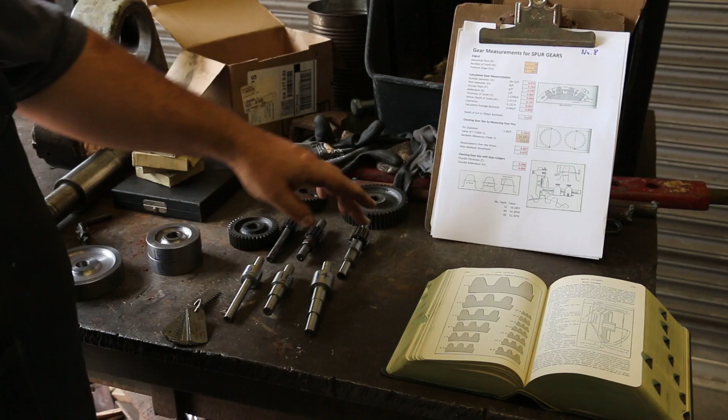So again, we have our pinion gears all laid out here, and you can see the original ones that we're going to be copying. These are just very worn, both the gears as well as the bearing surfaces. The bearing surfaces are probably the biggest problem on these, but the gears are also worn.

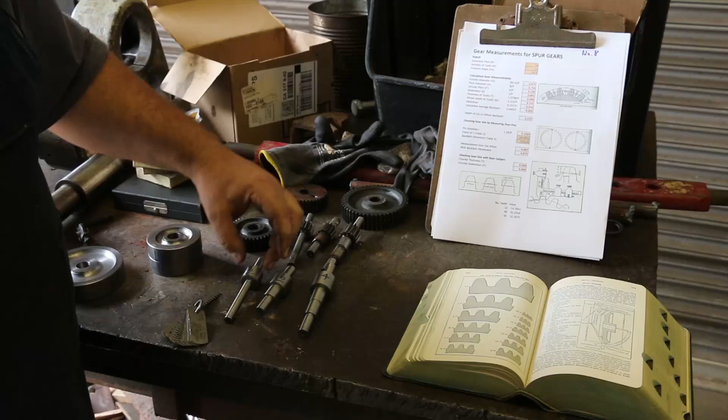So we've made the new blanks, and they're ready to go. But before I made the blanks, I had to figure out, because some people were asking me, well, how do you know what size to make the areas that you're going to cut into the gears? And that's a really good question.

There's a couple of ways I guess you can go about doing that. Obviously, if you've got the originals, you can just measure what's on here. But in this case, we've got some significant wear on these gears, so it may not be exactly the right outside diameter. So to verify that information, I basically did a little bit of math and calculated what that should be, and it's fairly easy to do that.

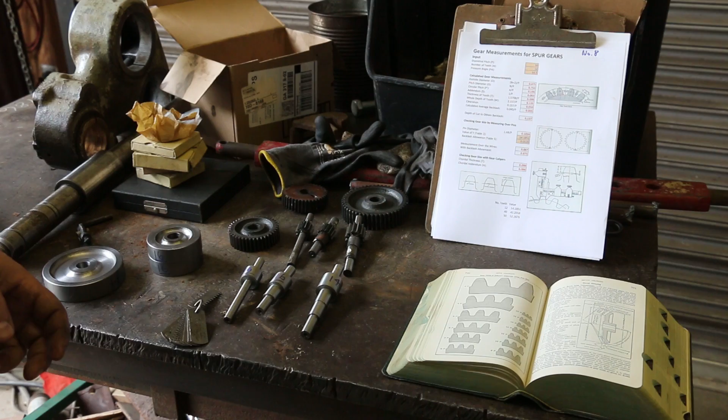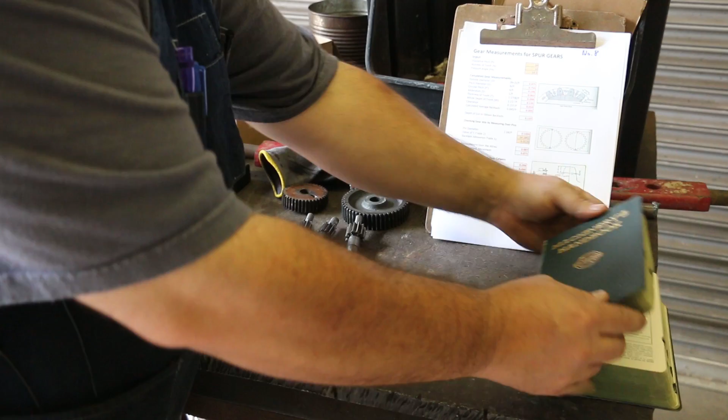So if you're going to cut any gears, you need to have a good reference, and most machinists are going to have a copy of Machinery's Handbook. If you don't have a copy of that, this is a really good reference to have. There's a whole section in here, probably over 100 pages long, that just talks about gears and gear making. Pretty much any information that you need to know, you can find in here.

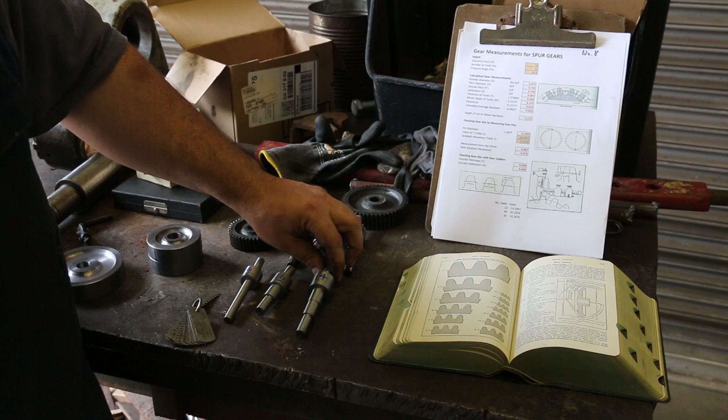So what do you need to know? Well, depending on your application, you could start out with knowing several different things. But in a case where you're copying gears, the two pieces of information that you really need to know are, number one, the diametral pitch of your gears, and the number of teeth that you're cutting.

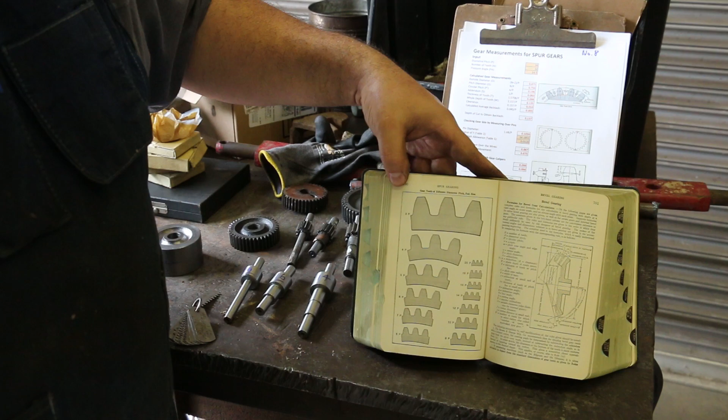Now, the diametral pitch is basically the size of the actual gear teeth. The pitch is going to be a number, and it's going to come down, I believe, to the number of teeth per inch is the way that this works. That may not be exactly right, but I'm pretty sure that's what the pitch is.

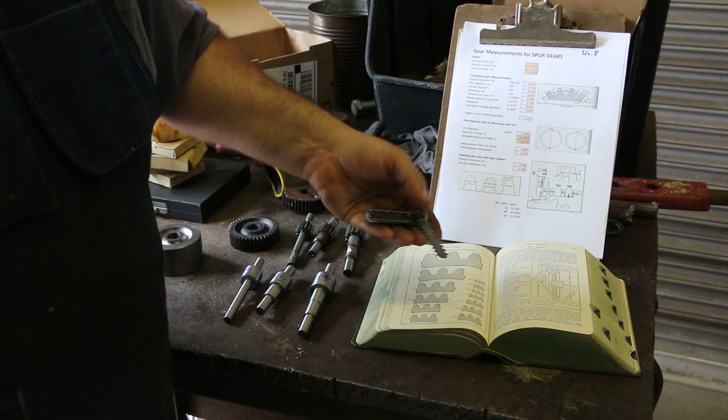In my book here, we've got a chart showing like starting at a 3 pitch going up to a 20 pitch, and as you get to a higher number, the teeth get smaller. You can use this to scale, so you can use this right here to determine what pitch your teeth are. Now, what I've been using is I actually have this little gear gauge, made by Boston Gear, and you can find these. They're actually fairly expensive.

I found this one at a tool meet and got lucky. I think I paid about 10 bucks for it. These are basically just little gauges that have the pitches on there, let's zoom you in here.

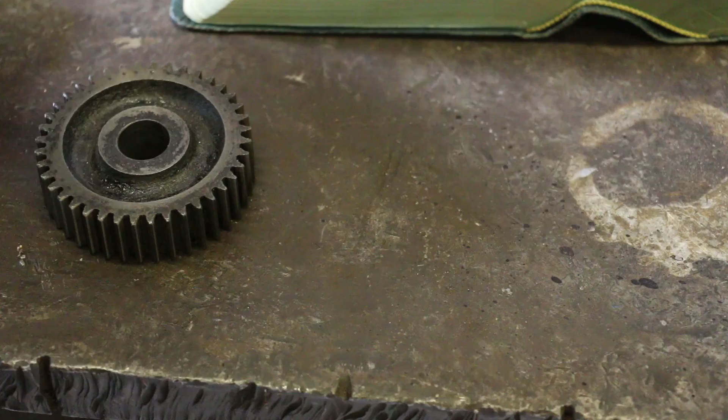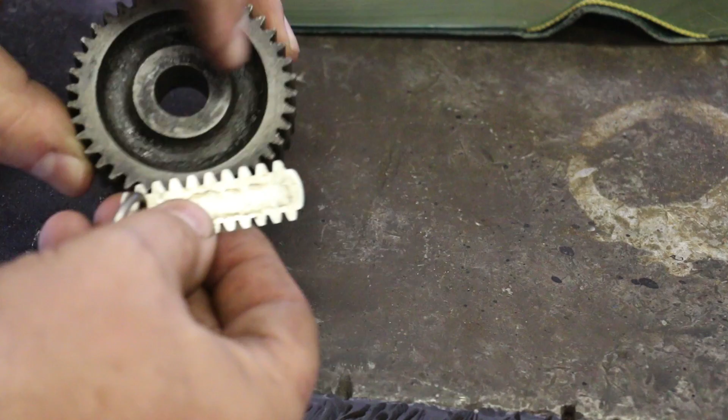We'll show you how this is used to determine the pitch. We'll start with this bigger gear here. You can basically take this little gauge and find the one that matches. We go to this one here, that doesn't mesh, and through trial and error, you can determine which one actually fits. It's kind of set up like a rack in the gear, and you just see the one that fits, and it's stamped on here.

That's the number 16, so this is a 16 pitch on this gear. My other gear is this one here. If you look, that 16 pitch doesn't fit. Let's see, we go to this one here. This one is a 14 pitch. So you can determine real quickly. It's a little bit easier to use this on a bigger gear.

We go to the pinions, and it's the same thing. There's your 14, and there's your 16. That just walks right down through there. Get that in the screen where you can see it, and that might help.

So anyway, we've determined the pitch, and then of course the number of teeth, you just count them. In fact, you can probably see on here where I put little dots. I took a little marker and went around that and just counted the number of teeth and double counted them to make sure I had them right. But with the pitch and the number of teeth, then you can start doing calculations to come up with what the dimensions need to be.

So to help me work through this, I basically went into Microsoft Excel and created a spreadsheet that will do my calculations for me. But all of the formulas to determine this came right out of the Machinery's Handbook, and anybody can look up in there. You can go online and find these formulations as well. I got all the formulas right out of the Machinery's Handbook.

So up here at the top, I put in my diametral pitch, which I'll signify by P, and the number of teeth, which will be N. That's the normal nomenclature for those. I also got pressure angle on here, which all my gears are going to be 14.5 degree pressure angle, and I'm not going to talk a lot about pressure angle. Generally speaking, most gears are either 14.5 or 20, but it's kind of hard to measure that. If you want to find out more about pressure angle, get out your Machinery's Handbook or go online. But I do know that mine are all 14.5.

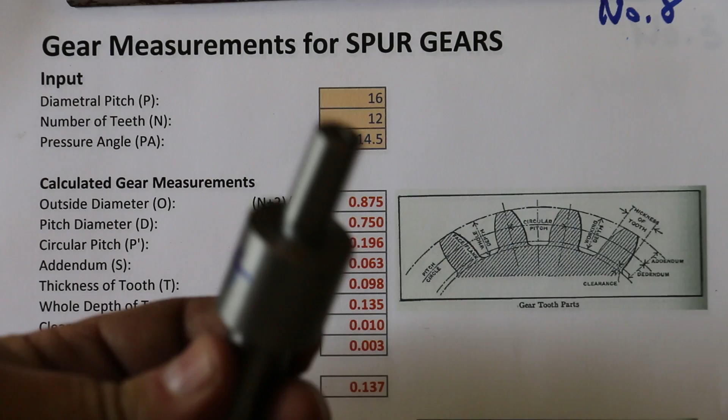So one of the questions was, what is the outside diameter of the piece that you're going to turn? What does it need to be? Well, it's fairly easy. You just use a formula, number of teeth plus 2 divided by the pitch, and you can calculate what the outside diameter should be. In this case, it comes out to 0.875 for that gear. I actually scanned, to help me, a diagram out of the Machinery's Handbook and put it on this so I could help remember what's what.

Most of these other measurements are not necessarily important to know when you're machining, but some of them are used later on in other calculations that I make. But I went ahead and calculated everything out. So the big thing is what does the outside diameter of the gear need to be, and also, what is the depth of cut that my cutter needs to make as I'm cutting these, so that I kind of have a target to go for.

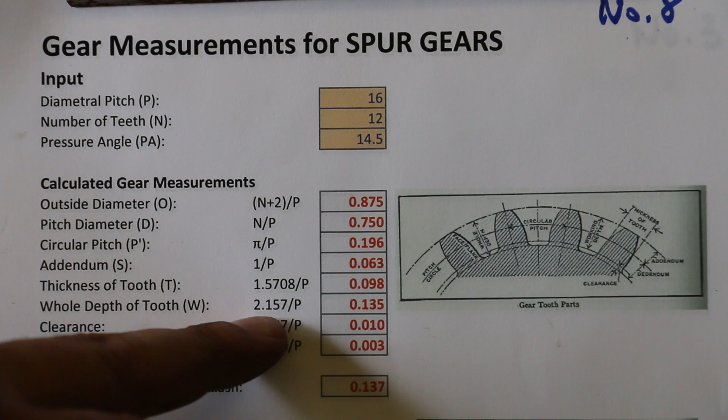If you look at the whole depth of the tooth, it's simply 2.157 divided by the diametral pitch, and that'll tell you how far down you need to go. You also need to factor in some backlash. These gears mesh together. If you cut them just right to the book, there's absolutely no play between them, and the gears will bind up. So you actually need a little bit of play, a little bit of backlash.

There's a formula to calculate what the backlash should be based on the number of teeth and the pitch. In this case, you need about 0.003 of backlash, and using another formula, the depth of cut to obtain that backlash is 0.137. So I need to cut 137 thousandths deep with my cutter to get where I need to be.

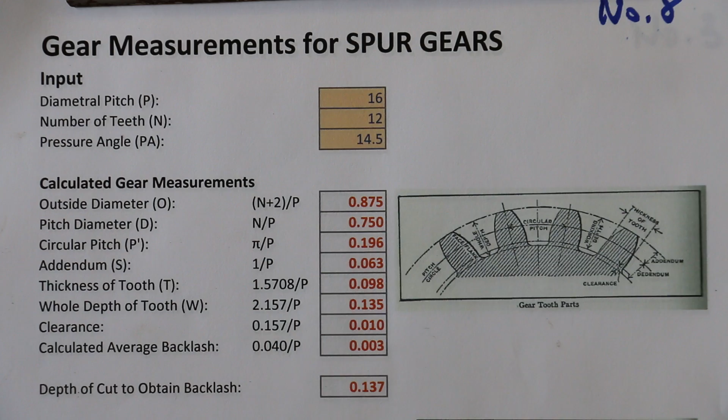So anyway, I created all this. There's the formulas I used right here to come up with all this stuff, and that's how you do it. On the outside diameters, I went back and measured the original gears to verify I'm in the ballpark, and quite honestly, I was right on the money.

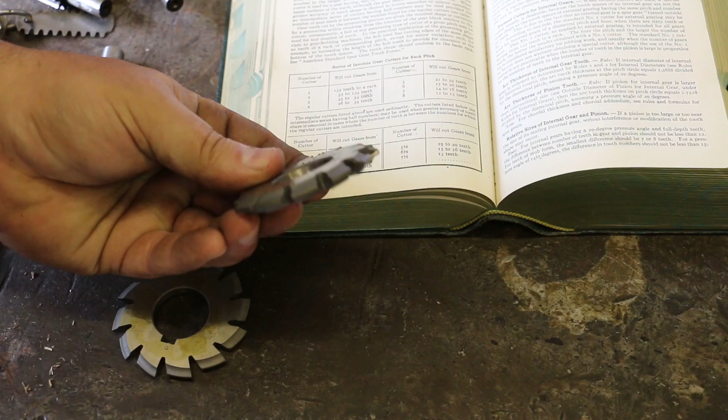The measurements were the same, which tells me I was doing it right. So once you know your diametral pitch and how many teeth you've got, the next thing you do is get the right cutter to cut these. There's a series of what we call involute cutters, and if you look at the profile, it kind of matches that involute spline shape of the gears you're cutting.

But because of the number of teeth, you're going to have different diameters of gear. One cutter for one pitch doesn't cut it. You have to have multiple cutters because the geometry of that tooth changes depending on the number of teeth you have. There are actually 8 different cutters, generally speaking, to cut a range of teeth for each diametral pitch.

Again, you go to your Machinery's Handbook and look this up, and there's a little chart in here, and we'll zoom you in there where you can see that.

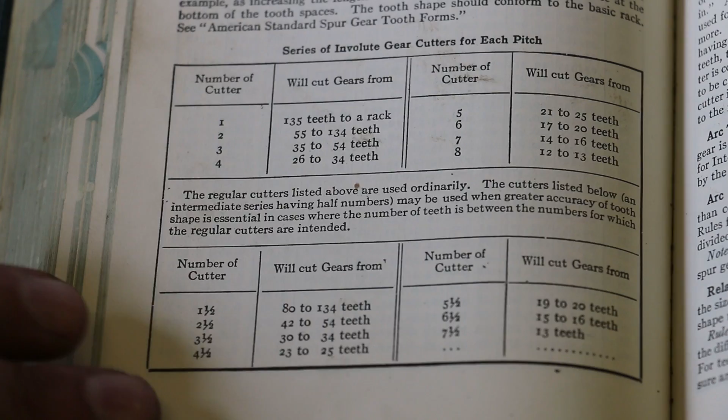So there's 2 charts in here, and actually I said there's 8. Back a long time ago, they used to have half series, so there was a gear or cutter in between each one of these numbers. But generally speaking, most of them are just going to be the 8 cutters. There may be some halves still out there you can find, at least in old stock. I don't think you can get it in new cutters anymore.

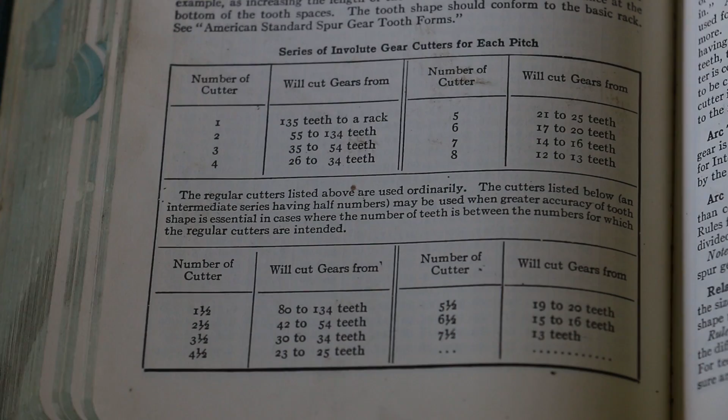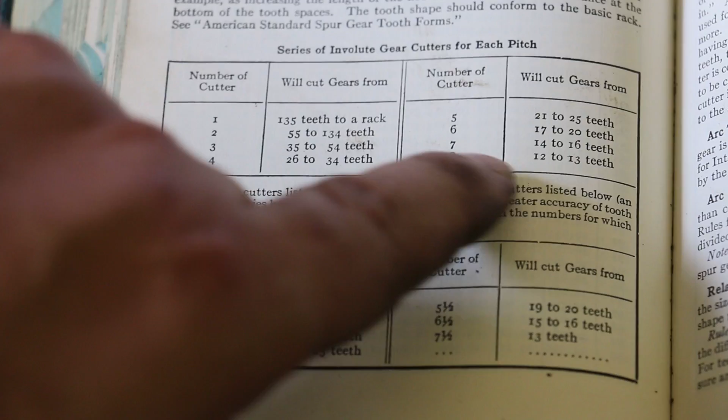What you look at here is, for each diametral pitch, there's the number cutter 1 through 8, and each one cuts a different range of teeth. I know I'm going to be cutting 12 teeth, at least in this first one. So if you look, the number 8 cutter cuts 12 to 13 teeth.

So that's what I have, a cutter for diametral pitch 16, and it is a number 8. That's this particular cutter right here, and you can kind of see the profile on there of what that's going to cut. So all of my 12 tooth, and I got both 16 and 14, so I got 2 different number 8s depending on the pitch.

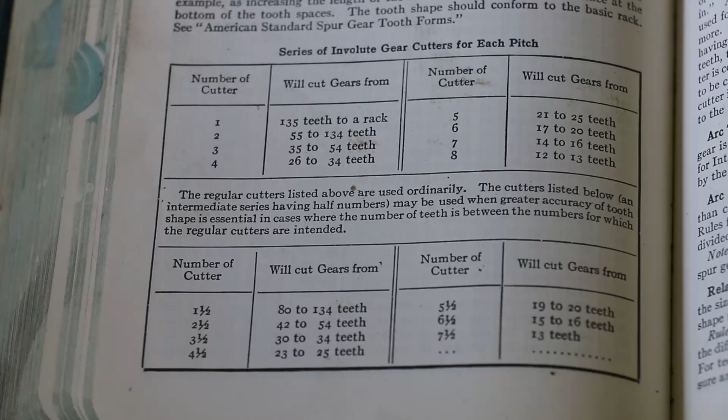My other bigger gears, one has 40 teeth and one has 50 teeth. It turns out both of these will be number 3s, covering 35 to 54 teeth, so you'll use the number 3 cutter. But again, I had to get 2 of them, one for a 14 and one for a 16 diametral pitch.

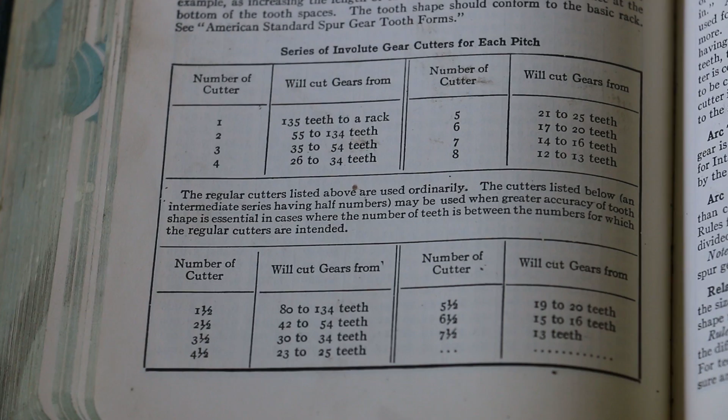So I've got all my cutters. I know my diametral pitch, I know my number of teeth, I've got my calculations all worked out for each one of my gears. So I've got my homework done, and now I'm ready to start setting up the machine to start cutting gears.

The next step is to get your dividing head set up for the number of teeth you're going to be cutting. We're going to start with cutting 12 teeth. All the pinion gears have 12 teeth on them. We have different diametral pitches, which means changing cutters, but as far as the dividing head goes, they'll all be 12. So the first 3 will have the dividing head set up the same.

This is a Brown and Sharpe type dividing head. I don't think this is actually made by Brown and Sharpe; I think this was one of the early clones. This dividing head was invented back in the late 1800s, early 1900s. I don't remember the exact year.

But when the patents ran out on it, it was such a good design that a lot of companies started copying this thing and making their own versions of it. Even today, several import companies are selling Brown and Sharpe type dividing heads, and the design has been virtually unchanged for 100 years, which is a testament to it.

It's a good design. This one here is an older one. I don't know who made it, though. It's not marked, but that's not important.

What is important to know about this dividing head is what the gear ratio is between this handle and what's turning up here. This part will be making revolutions around, and we want to be able to index this exactly the right angle for each number of teeth. But instead of doing it in angles, we're using ratios to calculate how far we need to move this.

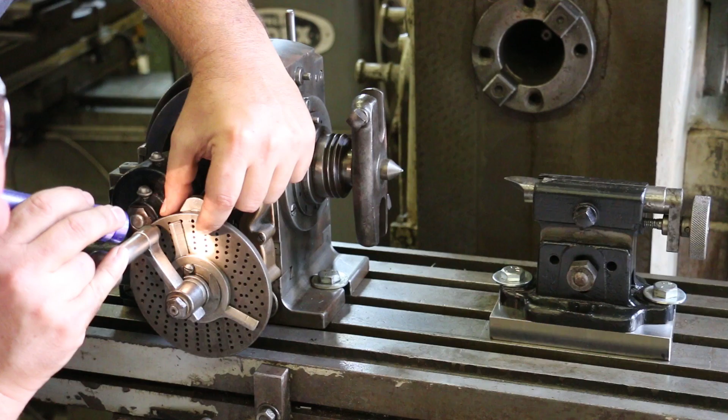What you have to do is, you notice this plate back here has a series of holes in it, and each series has a certain number of holes in a circle around it. The bottom hole series goes from 21, 23, 27, 29, 31, and 33. That's the number of holes that are around this thing.

I'm in the series that has 33 holes in it because I can actually come up with a third out of that number, and I could probably get that out of some of these other holes as well. But what I want to do is go 3 and 1/3 times. I'm not going to stop in every hole, but because it's 33, it's going to be 11 thirty-thirds.

So I've got this mark, so I'm in this pin. I got 1, 2, 3, 4, 5, 6, 7, 8, 9, 10. That's the 11th hole, which is 1/3. I've got this little sector arm set so that if I push this one up against this pin, this will be the next pin I need to go to.

But I've got to go 3 full revolutions in the part. So I go 1, 2, 3, and a third. Drop it in that pin. I move my sector arm around. 1, 2, 3, and a third. So on and so on, all the way around. You'll do that 12 times, and you will come up with a full circle.

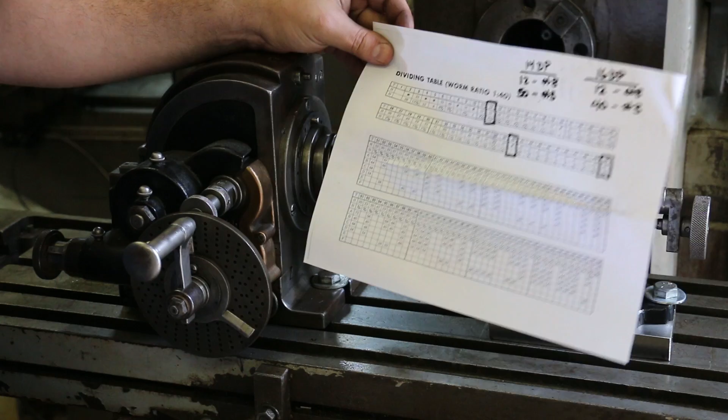You can cheat. I've got a table here that basically shows you, for the number of divisions, what plates you need to use and how many holes you need to move. So for my 12, it helps me use a 33 plate and go 3 and 11 thirty-thirds.

We're going to be cutting a 40 tooth gear. Remember, it's a 40-to-1 ratio. So on that, it's just 1 revolution and go back to the same hole. You can use any plate you want as long as you go back to the same hole every time for the 40s.

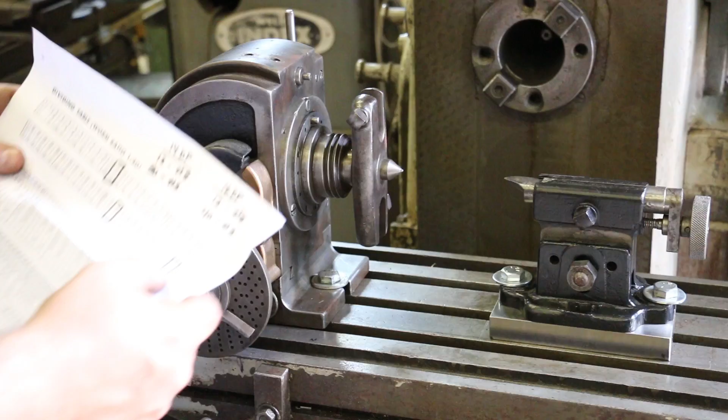And then on the 50s, I'll use a 20 plate, and it's 20, 16/20 is what I'll have to do to cut a 50 gear. So I'll have to change plates for the 50 gear. I don't think I've got a 20 on this one, but I have another plate over there that has 20 holes in it.

So the next thing we need to do is get our footstock set up on the machine so that it's exactly at the right height. I have some adjustment in this—it can go up and down, and it can tilt back and forth.

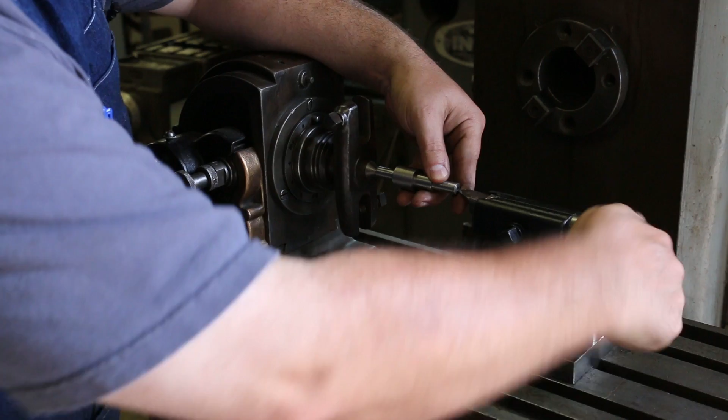I apologize, I did this part off camera. This is my part that's going to go in here. When I was setting this up, I used a long reamer with a nice ground shank and two center holes, one on each side. I set it up and used the dial indicator, going back and forth until I had that shaft running perfectly straight across. I can bump this around up and down to get it right where it needs to be. It's set now, so we're good to go.

That part was done off camera. This is the part we're going to cut, and it's going to go between centers. We're going to turn this over here, and that's going to turn that part. But in order to keep that part turning at the exact right ratios or index time, there's nothing that will do it naturally—so we've got a dog drive plate, and we're going to put a lathe dog on this to help turn it. Let me take it back out.

This is the lathe dog. I've got a little piece of brass shim in here because I don't want to mar the surface up, and I'm going to tighten this down good and tight. Let me get a wrench.

We'll put this back between centers. This time, notice that the lathe dog is going up into the part behind that's going to drive it—the part that drives the lathe dog. I'm going to put it back between centers.

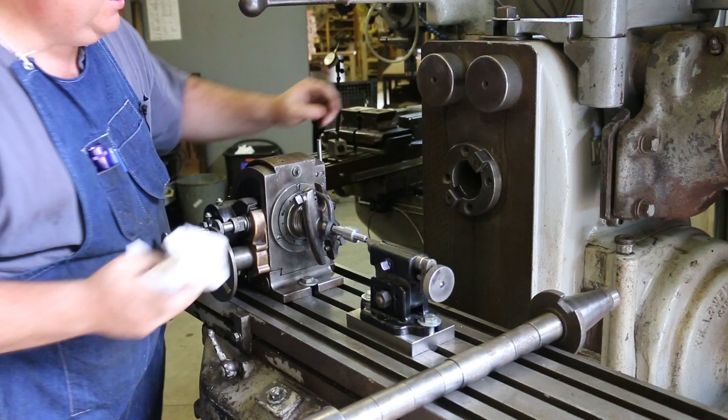So now we're ready to put the actual milling arbor in. All of our cutters we'll be using today fit on a 1-inch arbor, so I've got my 1-inch arbor here. This is a 50 taper up in here, and I always like to clean this taper out anytime I come in, since it's open to the elements and you always get a little dust and stuff up in there, potentially even some trash.

Same thing here—I'm going to wipe down the mating part, and this 50 taper arbor goes right up in there. Then we'll go around the back, and I'm going to tighten that up using the drawbar, which will hold it firmly in place.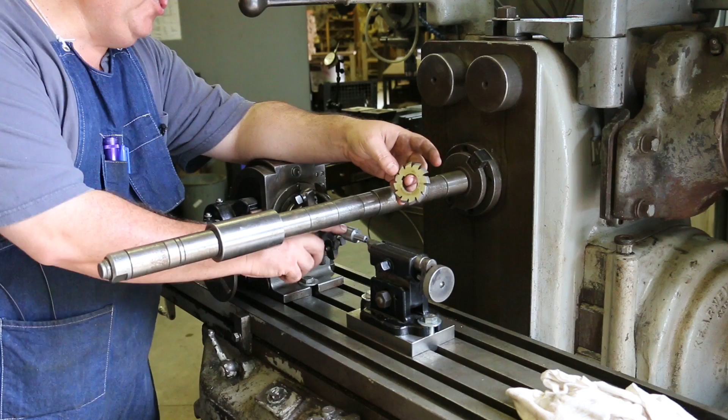Next step is to get the right cutter to go on the shaft. I've got 4 cutters for this job, and to make it easier on myself, I wrote on each part what the pitch is. I know this is a 16 pitch because this is a pinion gear, a small one. I've got the cutter here, and it's scratched right on it: DP16 for diametrical pitch, and this is the number 8—which is the one that cuts 12 to 13 teeth. So I've got the correct cutter for this particular gear, and now we're going to put it onto the arbor.

So I'm going to pull my nut off here, pull off my spacers, pull off my running bushing, and pull off some more spacers.

This cutter has a keyway on it, and there's a key on my shaft, on my arbor here. So now that cutter is on there, and it's geared in, or keyed into place.

And we'll put some spacers back on here. Put my running bushing back on.

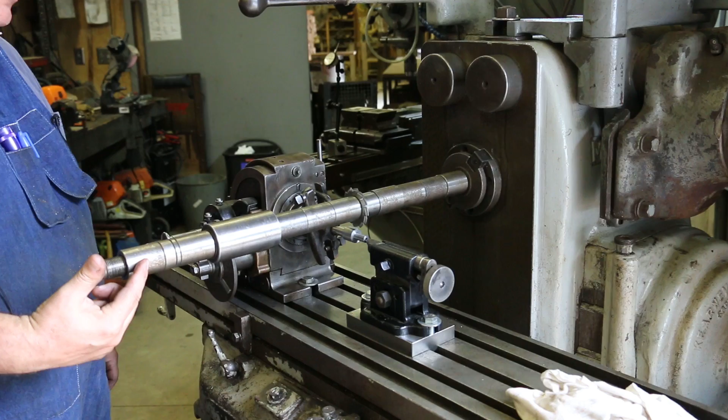A lot of people will run this running bushing all the way out at the very end. The shorter that you can make this section here, the more stable your setup is. I could probably even shorten it up a little bit more than this, but this is going to be plenty good. Notice my arbor or my bushing is not at the very end - it doesn't have to be at the end. And this is a rather long arbor here. I'd almost wish I had a shorter arbor because I really don't need all of this for this particular job.

Go ahead, we'll tighten that up real good and tight. All right, so now that should be running good and tight right in there.

Next thing I want to do is put the actual overarm support that will run on this bushing. So I'm going to come over here now and extend out the overarm supports. These are on a little rack and pinion - I got a little hand wheel over here, and I'm just going to extend these out pretty much all the way to the end. And let me go grab my overarm support.

Again, before I put it on there, I want to wipe these down, make sure they're good and clean. Put that right on the end, and I'm going to go ahead and tighten this nut up right here.

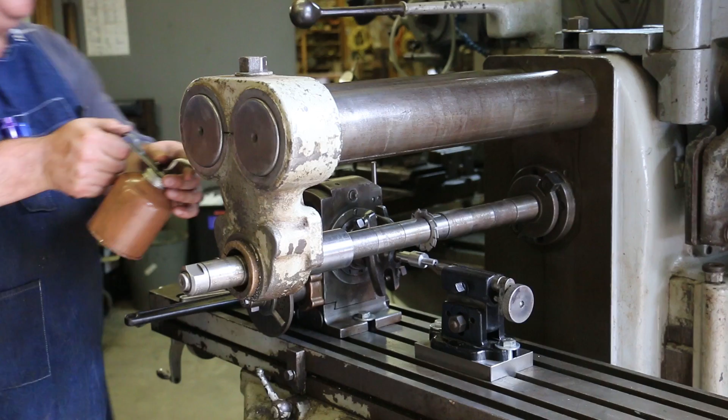So now I'm just going to pull this back over the running bushing, and see, it just went right on. But I'm going to oil that up real good first - make sure I got plenty of oil in this running bushing to start with.

And there we go. Next thing we'll do is we're going to tighten up the overarms. There's 2 bolts up on the top here that will tighten these up and make them just as rigid as we can get them.

My next step here is I need to get my cutter centered exactly over the center of this part. To do that, I've come in here and I've got a machinist square that's running right up to the edge of this part. I had to go put a 1-2-3 block under here because this is a 5.5 inch machinist square, and I really needed about an 8 inch or at least a 6.5 inch. So anyway, maybe I need to find me a bigger machinist square.

No big deal. But what I'm going to do is come in here with the cross feed now, and I'm going to pull this over until that square just touches right there. To help with this, you can shine a light behind this - I'm going to get in the way of the camera with the light because of my arm, but anyway, you can see that. You want to get it right up against the side, right there.

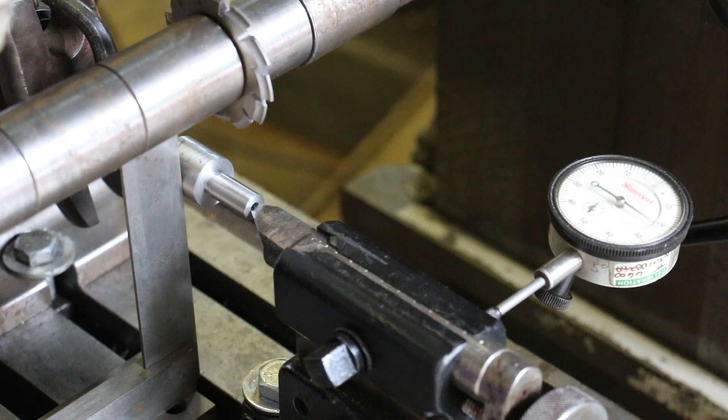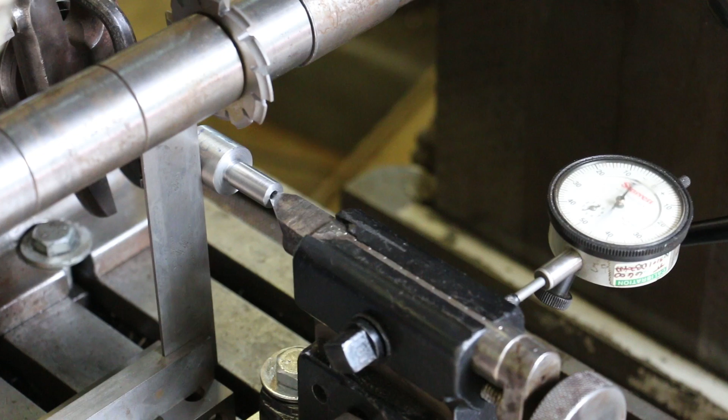So I've set my dial indicator up on 0 where we were on the other side. I've moved my square around to the other side of the cutter now. What we're going to do is just move everything over and keep track of how far we've moved it to get everything to touch on this side. So that's 100, 200, 300, 400, 500, 600, and we are touching right there.

So I'm at 655 thousandths. Now to find center, I take that 655 thousandths, divide that in half. I've got my calculator here, it comes out to 327.5. So I'm going to re-zero this out right here, and make sure I got a good 0. There we go.

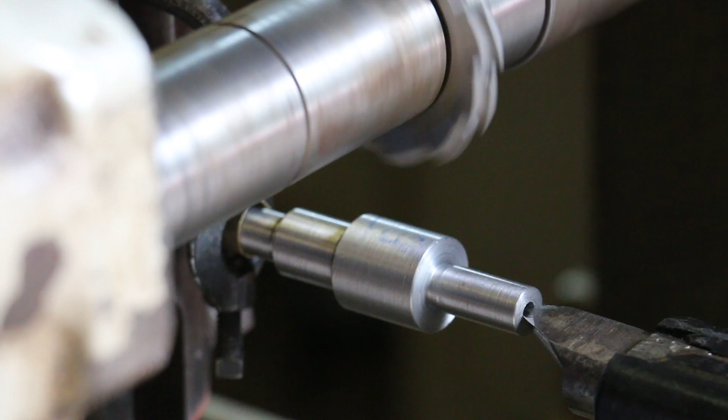So we're getting ready to start cutting here, but before we do, we need to touch off so we can get our depth. So I'm just going to raise the table up until that cutter is just touching, and I'm going to just ease into it, and that's it.

Do that again. All right, we're just touching right there. I see a little mark on there, and that's going to be 0.

So we're ready to dial in our depth of cut, and according to my calculations from before on my printout for this gear we're cutting - 12 teeth, 16 diametral pitch - I need to go a total of 137 thousandths. But I'm going to purposely go a little shy on the first cut because I want to get some measurements and verify everything. So right now we're just going to go 100 thousandths on this first cut pass, and then after I've done my first round I can make some measurements and make sure we're where we need to be.

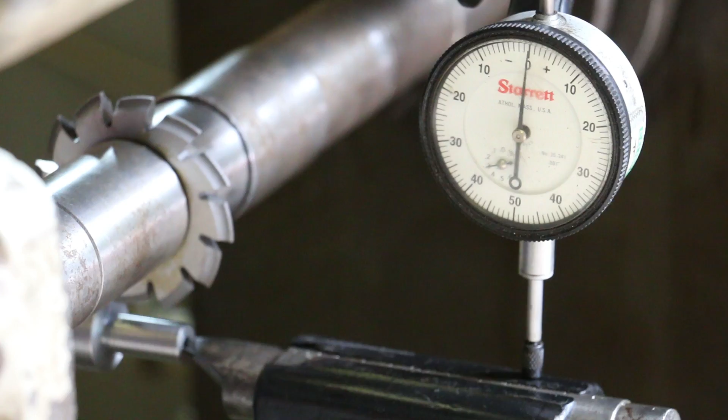So we're right here on the verge of making our first cut, but before we do, there's a couple of quick things I want to mention about the dividing head. Number one, when you're turning this, you always want to turn it in the same direction. It doesn't matter if you're going left or right, as long as you always go in the same direction. There's a certain amount of backlash in the gears in this thing, so if you have to go forward and then back up and then go back, you need to make sure you take that backlash out. Go forward, back up to where you can feel everything moving, go past the point of backlash again, and come back until you feel tension, then go into the pin that you want to go into. As long as you take that backlash out, you're fine.

The other thing is, you can't see it, but on the back side of this dividing head there is a lock that locks everything in place. So every time you get it set, you want to lock it, and that will also take any backlash out to keep it from turning ever so slightly while you're cutting. So we're ready for our first cut.

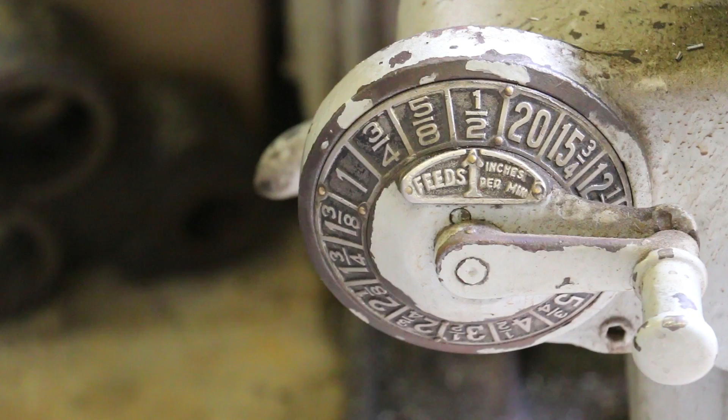A little bit about my feeds. I can calculate what the feeds need to be using that calculator that I have, but quite honestly, feed is something I just get a feel for. So I'm going to start out at the lowest feed, which is half an inch per minute, and we'll probably ease that up. That'll probably be too slow, but I probably won't go more than about an inch, inch and 3/8, or inch and 3/4 per minute, somewhere along in there. We'll play with it and get it to where I feel like it sounds right, and then we'll leave it on that feed rate.

All right, let's let it roll. Feed is on. Put a little bit of oil in there. And it's starting to cut.

I'm going to take my feed up to 5/8 inch per minute. Now up to 3/4 inch per minute. One inch per minute. Inch and 3/8 per minute. Inch and 3/4 per minute - we'll probably leave it there. I'm going to let that cutter go until it's past center. All right, it's through cutting.

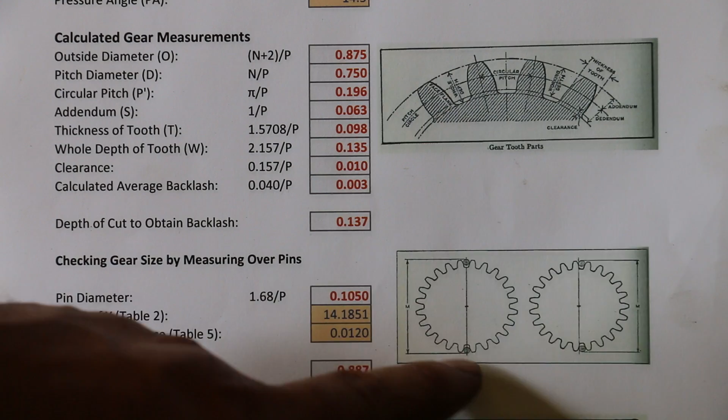So now it's time to start doing some measurements and figure out where we are. There are several ways to measure gears, but probably one of the best ways is to use a system called measuring over pins. This diagram shows it for a gear with an even number of teeth - you take a pin and put it between two teeth, then make a measurement over two pins, and that gives you a measurement to shoot for.

If you look at Machinery's Handbook, there are all kinds of formulas to determine what size pin you need to use and what these measurements need to be. I've done the calculations, and for this particular diametral pitch, a 16, you should use a pin that's 105 thousandths. There's a formula there, 1.68 divided by P.

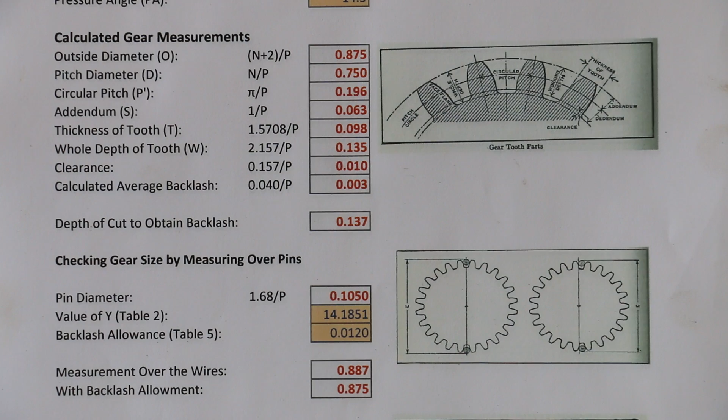There are actually several charts with different pin sizes you can use, and in the later versions of Machinery's Handbook, they have tables for multiple pin sizes. In my older version, the only one given is using 1.68 divided by P, and that's the one I'm using here. But you can use whatever formula fits the ratio you're working with.

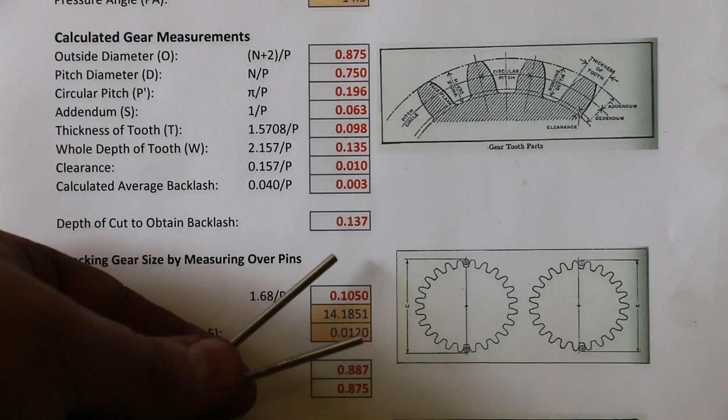So I've got my two gauge pins here, both 105 thousandths. I'll put one on top, one on the bottom, and use a micrometer to measure across those distances and figure out where we are. I determined while playing around with this that I didn't have enough hands to do this job right, so I've resorted to lightly clamping my micrometer in a vise.

I've got the two pins in across from one another, and I'm going to come over here with my micrometer and get a measurement across those pins. It's just awkward not being able to get there - I'm trying to stay out of the way of the camera. So it looks like we're measuring...

0.960 and about 3/10. I'm just going to work with thousandths right now. I'm going to subtract from that what I was going for, my target, which is 0.875 over the wires. So I've got about 85 thousandths total to go, but I need to divide that by 2 because we're taking it off both sides.

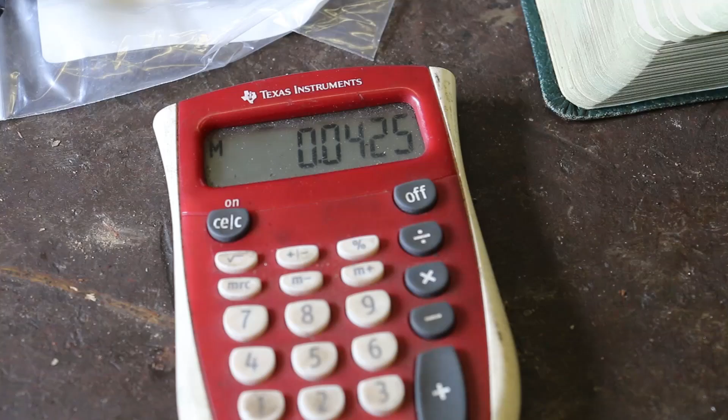So we need to move the mill up 42.5 thousandths, and we should be right on the money. Let me unlock my table, and we'll come up 42.5 thousandths. It should be somewhere right along in there. When I locked it, it moved a little bit, so let me back off - all right, that's plenty close enough right there.

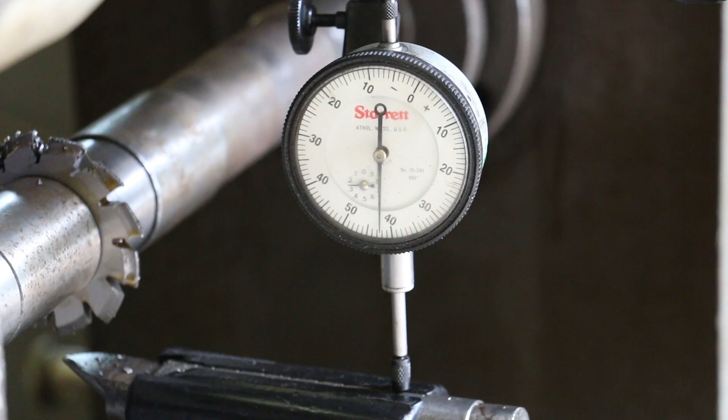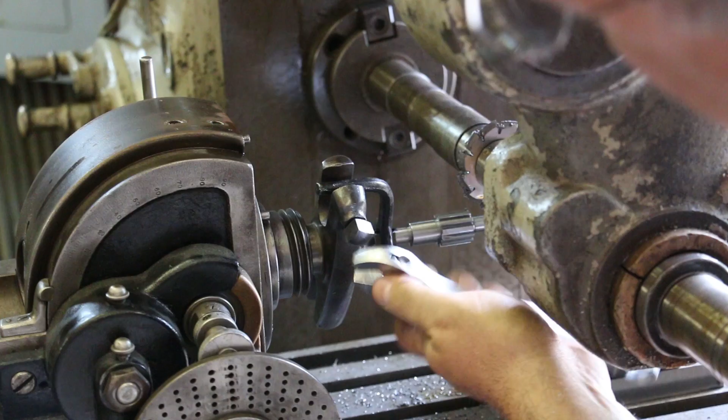I didn't mention this when I took it off, but notice I left the dog on here - that's important, because if you have to take it out of the mill for whatever reason, you can put it back on and get everything indexed right back up where it was before. That's exactly what we're doing here - we'll tighten the tailstock back up, and tighten this back up. Now we should be cutting back in those exact same grooves we cut the first round with.

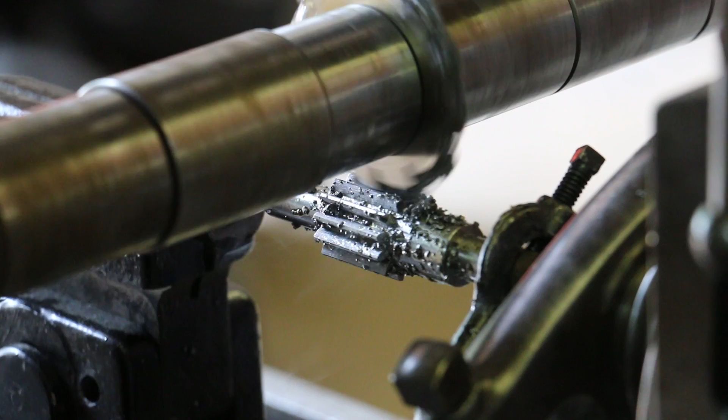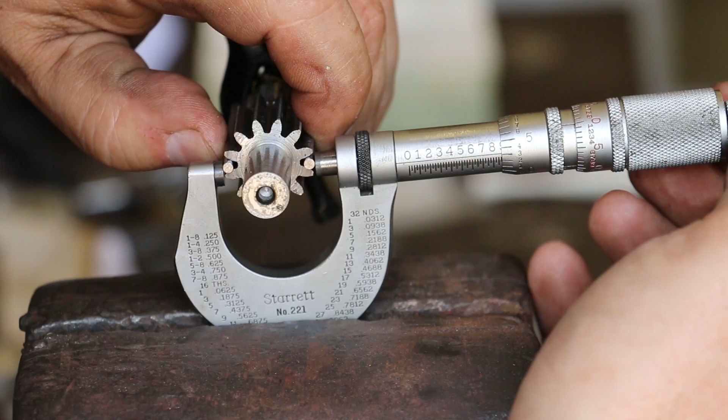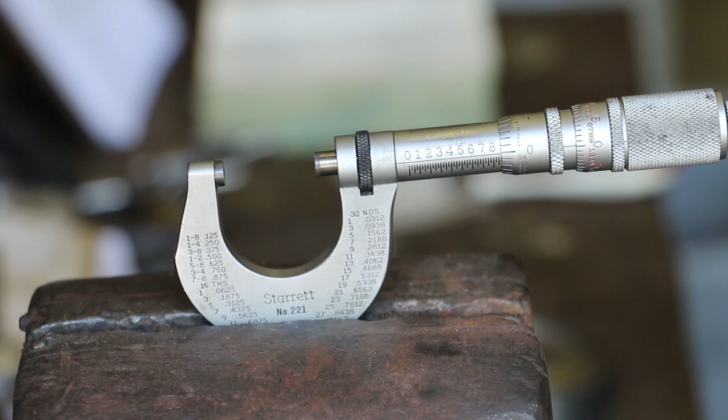We've got our depth set to the proper depth now for the finished cut, so we'll knock these out. We've got our pins back in here, and come in and make a measurement. Right there, and that's right on 875, which is right on the money. That's perfect - very happy with that. All right guys, one down, a bunch more to go.

I think you've seen the process. I'll probably cut at least the rest of these little pinion gears off camera, bring you back at the end, and we'll show you a few things on cutting the bigger gears when we get to those.

Just finished up cutting the last of these pinions, and these are all done now. I thought I'd give you guys a quick peek as to what they look like. Done some measuring - everything seems to measure up all right on these. Very happy with how it's turned out.

So we're going to move on, and we'll probably start next on getting the big gears cut. I've got a little bit of stuff to get ready for that - probably going to do that in a standalone other video, simply because I'm not quite ready to get started on that yet, and we're going to go ahead and get this one pushed up. So we will be back soon and show you those other gears being made.